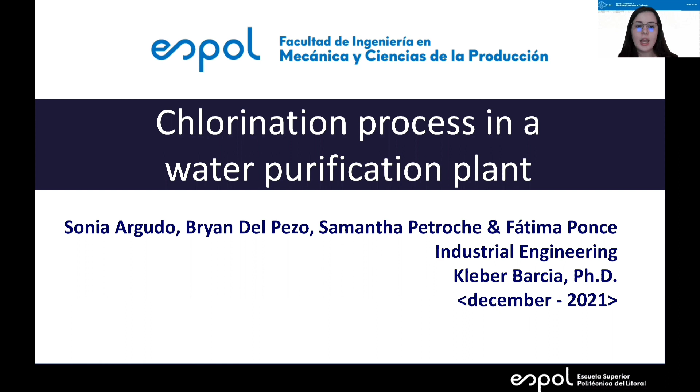We are group number 8, and we're talking about the chlorination process in a water purification plant. We are in step number 4 of the DMAIC methodology, improve. For the content, we have the company background. The product of this company is drinking water. These are the activities, but we're concentrating on the chlorination process, and the location of this plant is in Guayaquil.

This is the supply chain, and the principal customers are the water consumers, but also other departments in the company. In the project team, we have PhD Kleber Barcia as the project advisor, and the project analysts Sonia Argudo, Fátima Ponce, Bryan del Pezo, and myself, Samantha Petroche.

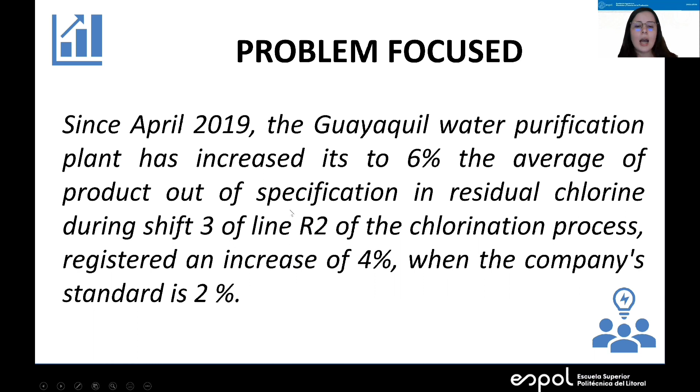Continuing with the problem focus, the Guayaquil water purification plant has increased to 6% the average of product out of specification in shift number 3, when the company standard is 2%. In the objective focus, we aim to decrease the percent of product out of specification in residual chlorine from 6% to 4% in shift number 3 in 4 months. Y in this case is the percent of product out of specification in the chlorination process. We use this equation for determining it.

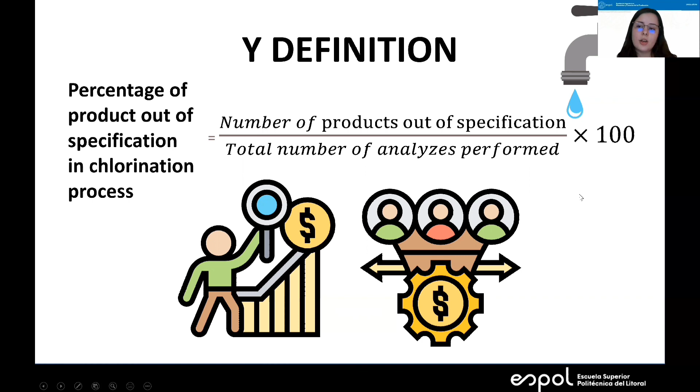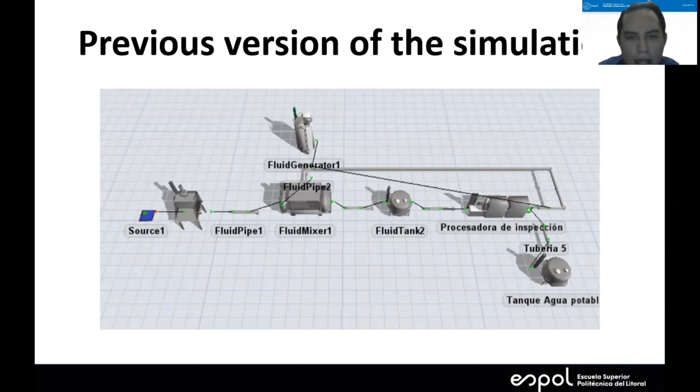Regarding the current situation simulation, there was a version in which only fluid elements were available, but due to the complications, we were recommended by Dr. Barcia and the engineering program to use fluids up to a certain point and convert them to objects, and then continue with the other machines. This was the current situation simulation.

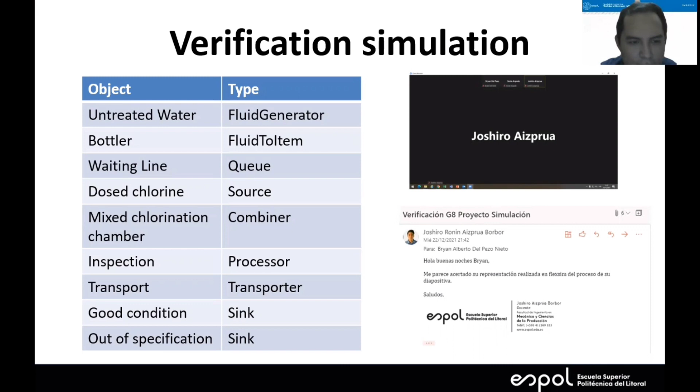In this case of verification, we presented the two versions to the engineer Joshiro, getting the go-ahead from him. Therefore, we have worked directly to find results with respect to the original. The distribution for the mixed chlorination chambers is a combined empirical distribution, and for the process inspection, the normal distribution.

For the validation simulation, the original results: 38 bags of 1 kilogram of chlorine, for 37 boxes, and the conveyor with 40 bottles of treated water of 5000 liters each. Of the boxes, 32 came out in good condition, while 5 boxes were out of specification.

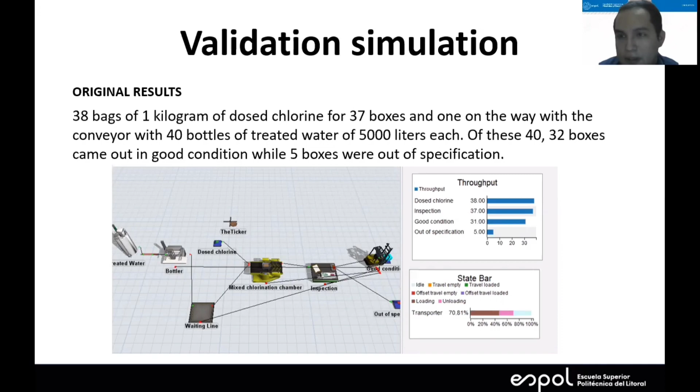This is our model. For the factors of the experiment, we take the values of the inflow and outflow rates of the untreated water, as well as the rate at which it passes through the pipeline and the entry rates of the bottles, the inspection machine processor with the minimum and maximum in which the mix stays around 30 minutes, and the number of objects in the transport, from scenario 1 to 5 and from 6 to 10, in series.

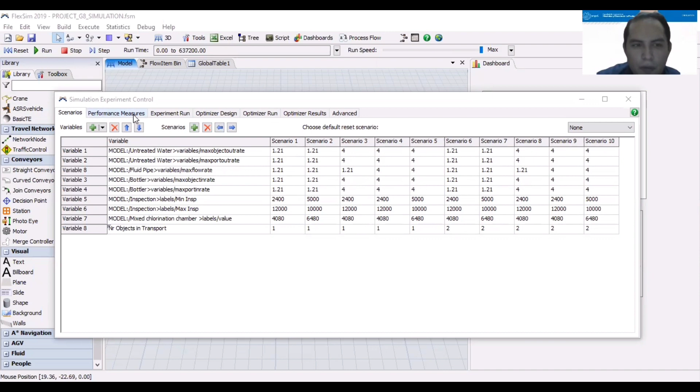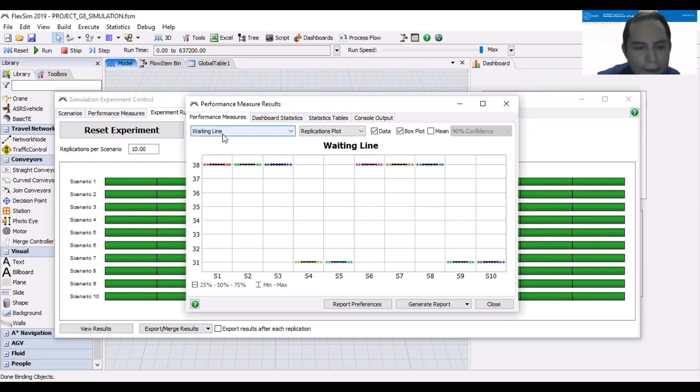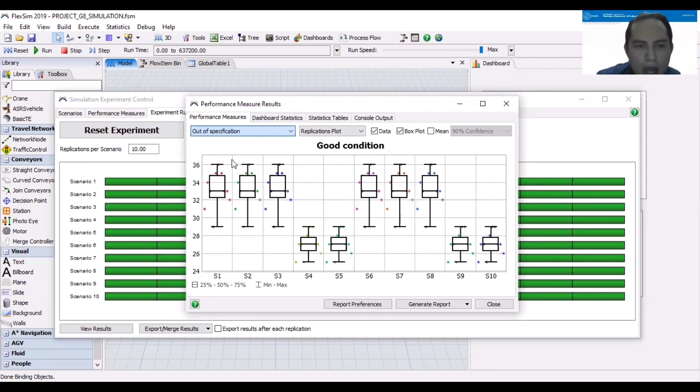These are the indicators and results. The best options will be S4, S5, S9 and S10 because they have fewer products in the waiting line. On the other hand, the output products remain, because they are still the smallest, so it should be considered in terms of cost and benefits with respect to the higher throughput. The rest of the good condition and out of specification products follow the inspection, depending on the percentage. And so with all this, the following solution proposal can be made.

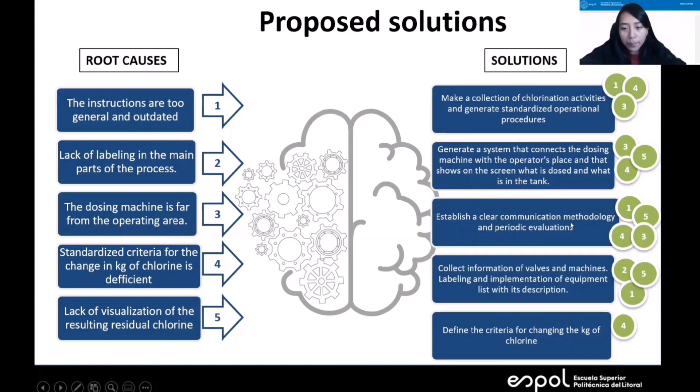Now we are going to present the proposed solution for each of the root causes. For example, the third root cause is that the dosing machine is far from the operating area. One solution can be to make a collection of chlorination activities and generate standardized operational procedures. Another solution can be to generate a system that connects the dosing machine with the operator's place and shows on the screen what is dosed and what is in the tank. And the last solution can be to establish a clear communication methodology and periodic evaluations.

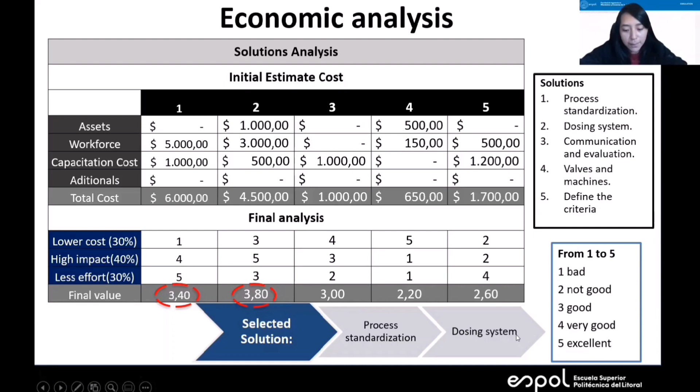Now, for the solution analysis, we did an economic analysis, estimating the cost of each solution, considering the assets, workforce, training costs, and additional costs. We also did a final analysis, considering whether the cost, impact, and effort was bad, not good, good, very good, or excellent. The result was that solutions 1 and 2 had the highest final value. So the solutions we selected were process standardization and the dosing system, which have high impact and require less effort, as we can see in our impact and effort matrix.

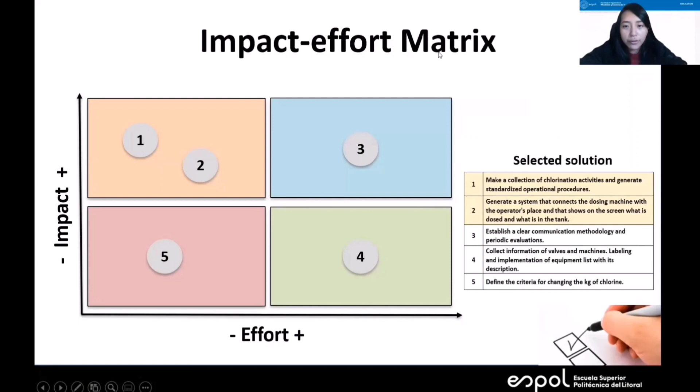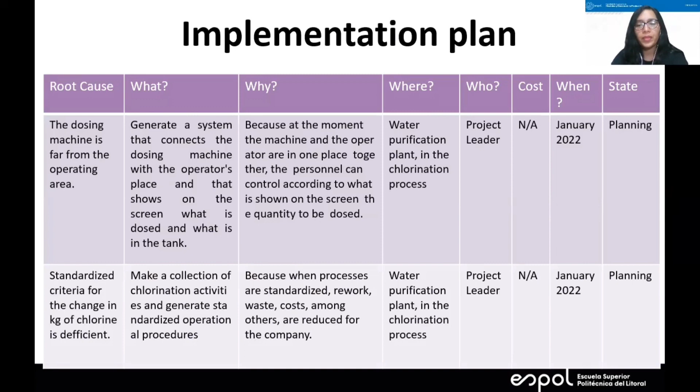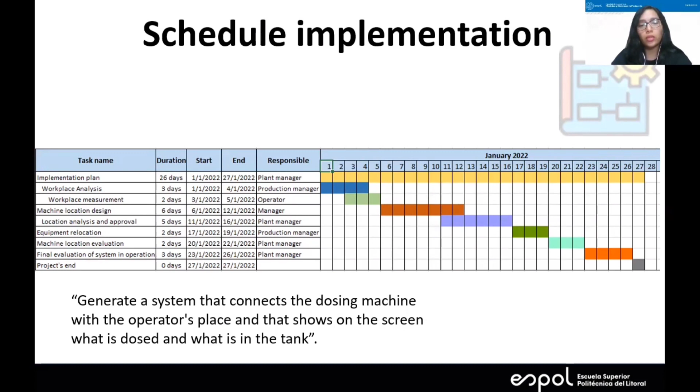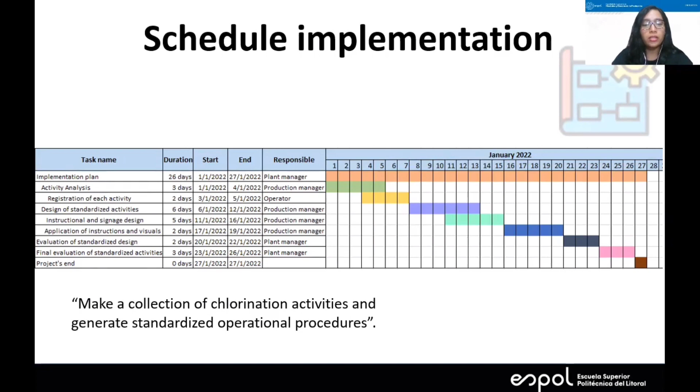Then we have the implementation plan. We have the two root causes with the two previously selected solutions, with the 5W, cost, and state of each one. The first solution is with respect to the distance between the operator and the machine. Next, we have the implementation schedule, with the task name, duration, start, end, responsible, and all days of the month, January 2022. This is for the first solution. This is for the second solution: make a collection of chlorination activities and generate standardized operational procedures.